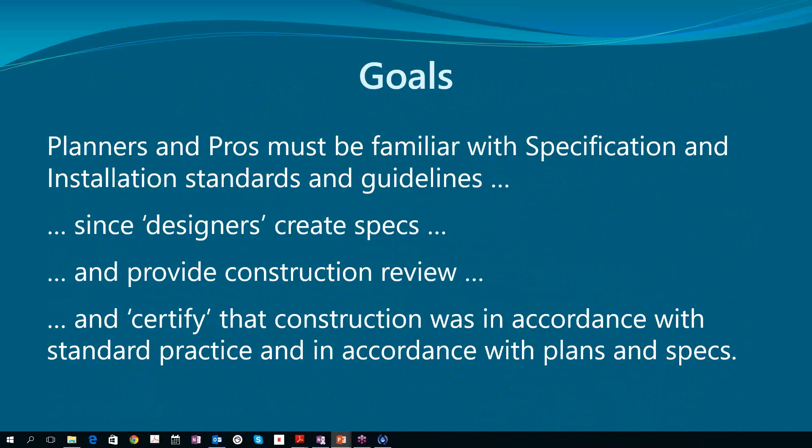Just sort of a commentary for designers, planners, or professionals. I think we need to understand that to stay out of trouble, and that's always our primary goal, is we need to make sure that the installers understand our specs for materials, configuration, and also installation procedures.

There's a bit of a debate going on as to whether we even need installers, that maybe any excavating contractor could do installation work because, after all, it's just following our specs. And I personally disagree, because the average excavating contractor doesn't necessarily understand the specs and doesn't understand what we're trying to communicate.

So installers, we need to ensure that installers have expert knowledge of SPM specification standards and so on, so that they don't screw up, basically, so they can understand what we're saying. If we make a reference to, for instance, sand needs to meet mound sand specs, we need to be sure that they understand what we mean and are able to find those standards.

I think we also need to ensure installers have basic knowledge of SPM fundamentals, like vertical separation, horizontal setback, system selection, problematic soils, and so on.

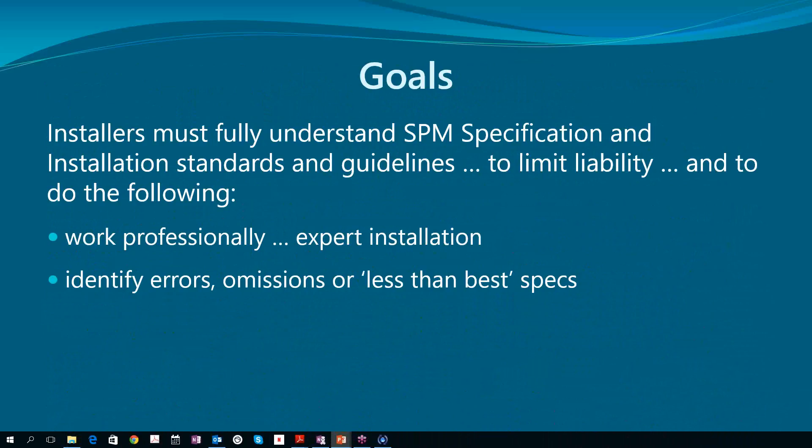And installers need to be able to actually do the work. They need to be able to work professionally, be experts at installation. They need to be able to identify errors and omissions or less than best specs. So again, if they find an error, or they find site and soil conditions that we missed or that we didn't capture in our test pits, installers need to be able to identify that and report it back to the person who did the design.

Installers should be able to evaluate and propose alternatives. So if for some reason the location that I indicated for tanks, for example, if it's not working for some reason, access or there's some obstacle, then a good installer will be able to evaluate all that and get on the phone, propose an alternative on the spot immediately, and that alternative will actually make sense relative to SPM standards.

The other reason for installers to understand this stuff is that installers also certify construction. Planners and professionals are supposed to get a letter of certification from the installer. It's not filed, it's just retained on records. It doesn't replace the letter of certification from the AP on record that does get filed, but planners are supposed to get that from installers, and those certifications declare that the installation was in accordance with standard practice and plans and specs. So in order for an installer to legitimately make that promise, they have to actually understand what the standards and guidelines are.

A bit of editorial here. For all of us, whether we're installers, planners, or professionals, to stay out of trouble, we need to realize how much is required in terms of self-study and compliance. We need to be experts at the SSR, the regulation, the SPM, ASTT, or APEG Code of Ethics. They're actually the same, by the way. Every word is the same.

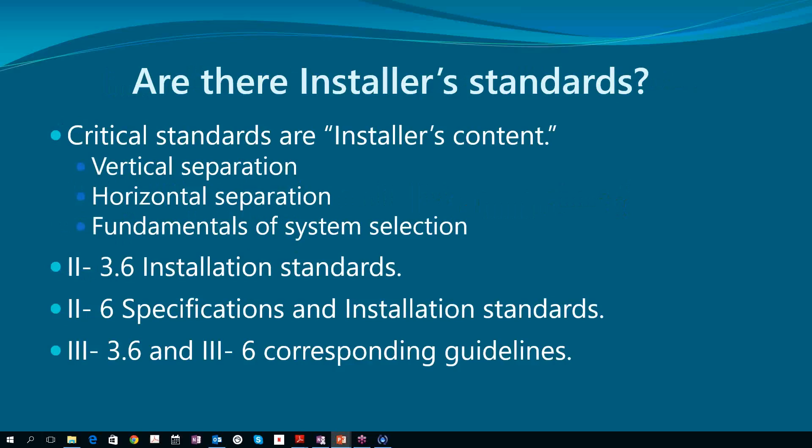So one of our learning goals was to be able to find stuff, and I guess I'm just going to ask whether anybody has any worries about how to find stuff.

Good. As I say, that was covered extensively in webinar number 1. So let's move on. We'll have a look at SPM version 3, volume 2.

3.6. And 3.6 is there. Make it a little bigger.

Some of the key points: it does say install the system according to the drawings and specs. I guess I would hope that goes without saying, but occasionally I run across installers who decided they didn't actually need to follow those things. They actually do, and if there's some reason why they can't, they need to communicate and get approval from whoever designed the thing.

This is new. Installers then need to keep photographs, the SPM says, and notice that's a critical standard in volume 2. APEG guidelines encourage photographs; ASTT guidelines and practice guidelines require photographs. It's the best way to stay out of trouble and is a requirement for installers.

So that means at key stages of the work, for example, before construction, the tank hole before tanks go in, tanks before they're backfilled with everything compacted and bedded, scarification of infiltrative surfaces, drain rock or chambers, and so on. You get the general idea. Take photographs so that they prove you've followed standard practice and the plans and specifications.

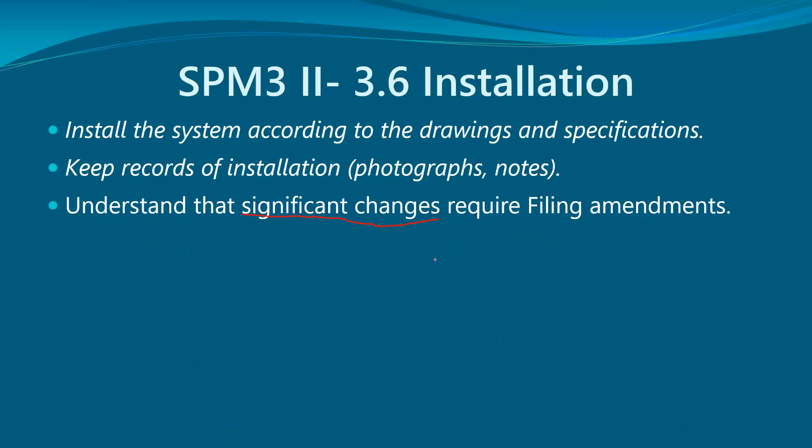So there were a few things out of this section, I think we captured it. Need to understand that significant changes require filing amendments. So if you decide you're going to move the tank location somewhere else, or even the dispersal system, that's going to require filing amendments. So you need to understand that and support that, and communicate with the person who did the design.

You should understand commissioning and what's required, because oftentimes you might be doing all or portions of that without the planner or professional attending the site. So that includes how to flush and test things properly.

It includes providing data for the maintenance plan, so I'm thinking about panel records. The maintenance plan is useless if it doesn't have the original panel records that say how many alarm events, cycle counts, and so on. For example, if there are 5 alarms recorded while we were installing the thing and testing it, then the maintenance provider, when he comes back 6 months, a year, 2 years from now, needs to understand how many alarm events were pre-existing. So hopefully it's still 5. Otherwise he shows up, sees 5 alarms, and needs to understand what caused those.

So panel record squirt height is another example, that needs to be in the maintenance plan. So installers need to do all those things. Sometimes providing data for the record drawing, and needs to support construction review once again.

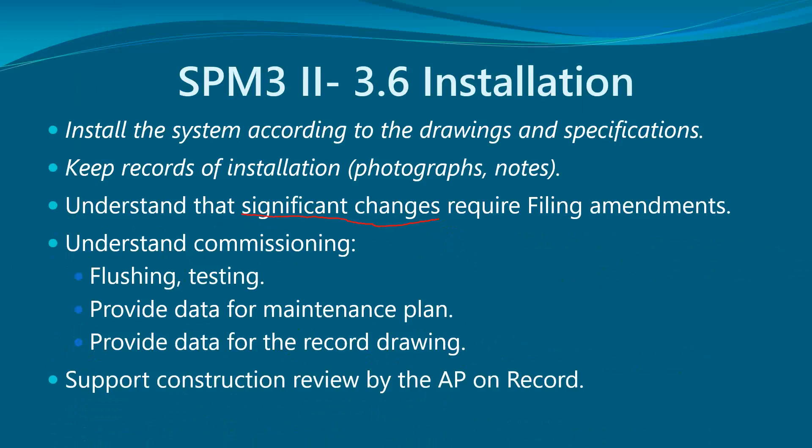Okay, 261. That's volume 2. Volume 2, 6.1, flow monitoring. Make it a little bigger.

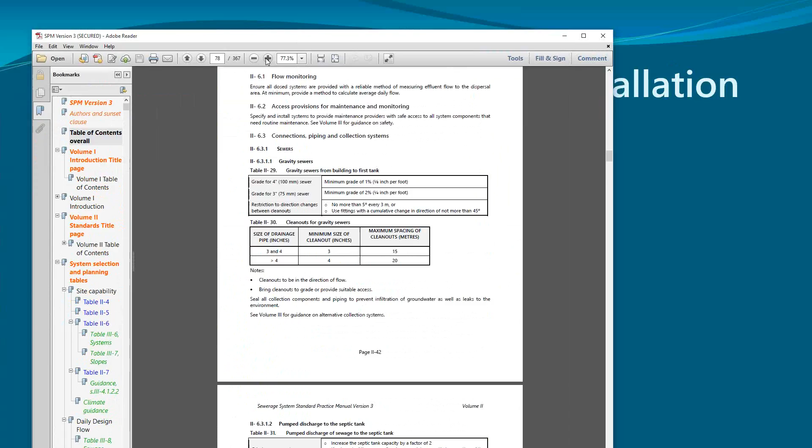So it starts this way, and this is new, so this is important. It's new in the sense that the old SPM said that all systems need to have flow monitoring provisions. And now, as a concession to practicality, it says all dosed systems, not all systems. So dosed systems, including pump to D-box, pressure systems, drip systems, and so on, they need to be flow monitored or have provisions to do that. And trickle gravity systems do not, which I think was quite practical.

In the past we were required to put flow meters at the house or something like that. Now flow monitoring applies to all dose systems. The flip side is that if it's a pump system, we need a control panel, because it has a built-in alarm and controls the dosing, but mostly because it supports monitoring by keeping track of cycle counts. So it's not acceptable to put in a pump system with just a high-level alarm. It needs to be a proper control panel that includes a high-level alarm.

What else did I have here? I got that, and access provisions. Let's go to the actual SPM 6.2. It says that we need access provisions for all system components that need routine maintenance. Let's have a look at that in more detail.

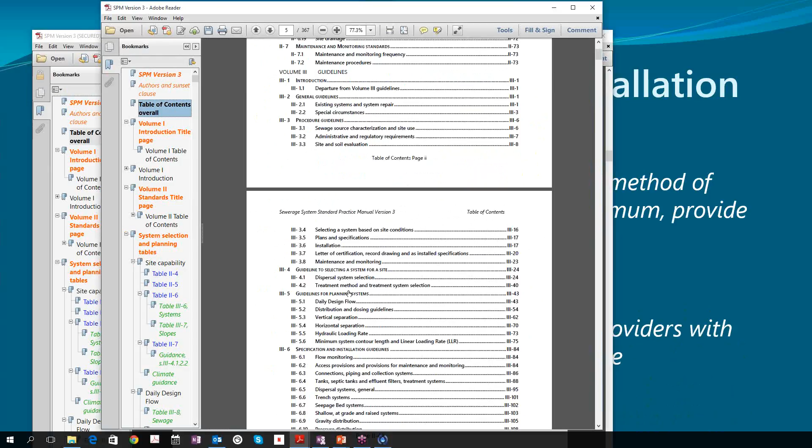That would be 361, flow monitoring. Let's see what the guidelines have to say. It lists a bunch of options on how to do it, including flow meters, even a tipping D-box. Tipping D-boxes are kind of hard to find, but it's a way of counting cycles, because you can put a mechanical counter on the tipping part of the D-box, and it tracks how many times that device tips. That's a known volume. So that's the way to accomplish flow monitoring for a trickle gravity system.

And floats and siphons now need counters to provide flow monitoring for them. Float and mechanical counters for dose systems, and control panels with records. Records of cycle counts is generally the easiest way. There's some other ways too, I guess.

Access provisions guidelines: those access provisions have to be extended up to grade, including tank lids, lawn boxes, and so on. D-boxes also need access up to grade. And that continues to be a source of contention with clients sometimes, because they don't really like the idea of having all these green lids all over the place.

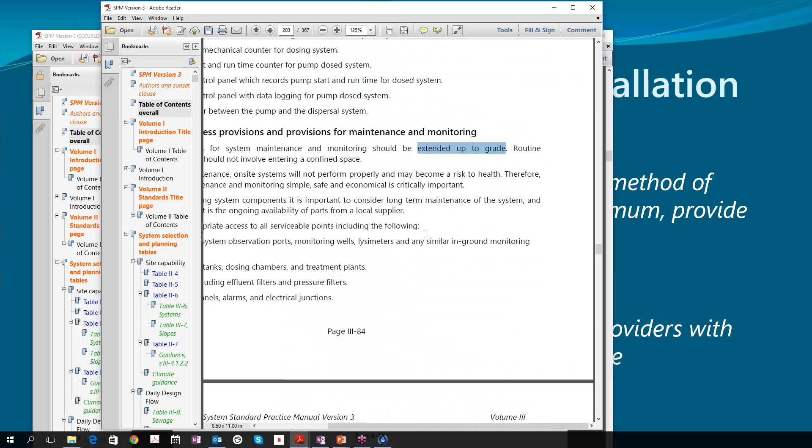But it is required, and I think Tim Wilson's advice is good - I know I've taken it. It's smart to have some lawn box lids and tank lids in your truck when meeting with the owner, so you can literally lay out the lids on the ground and ask, how would this be? Is this okay? If they say no, that's no good, then you can consider alternatives. The other reason is it makes sure they understand we've had this conversation, so there's no arguing after the fact about whether we can bury these things.

Of course, there are landscape features you can put over it, but they need to be accessible to grade. It also says maintenance should not involve entering a confined space. More on that later, but essentially all the valves and unions and filter handle extensions need to be within 15 centimeters of the top of the riser or the lid. It's still odd to me that a lot of people are missing that point. I was looking at one just a week and a half ago where the union was 3 or 4 risers deep, 3 or 4 feet deep. So that's not very helpful - you can't pull the pump out if the union's out of reach.

Let's move on then. Where else are we going? Appropriate access to all serviceable points, including observation ports, infiltrative surface observation ports, monitoring wells if any for groundwater monitoring, lysimeters, and other in-ground provisions. Those are a type of sampling device for drawing a sample out of soil, which we need for combined treatment and dispersal systems, amongst other things.

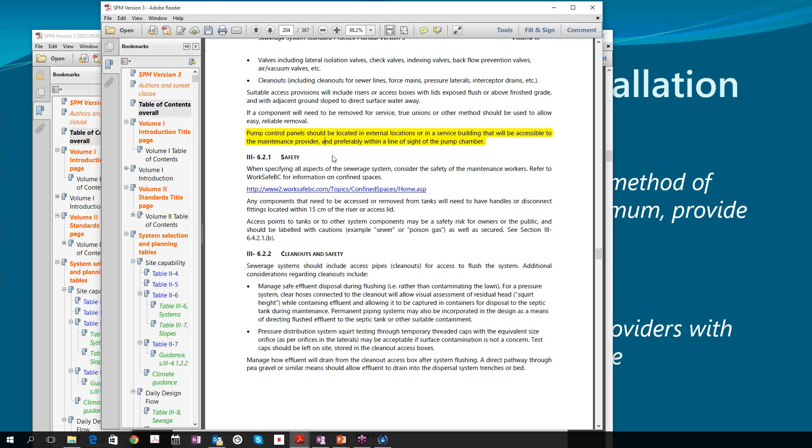Preferably they are accessible outside and within a few steps of the pump chamber, because at maintenance time you need to be able to look in there and do things, including confirming that the pump's operating, draw down, and all that sort of stuff. So ideally the panel is a few paces away from the pump chamber. Let's see if we captured everything there. I think we did.

Sometimes I guess it's possible - I think they're about 9 inches tall, so if you only had 9 inches of cover, you might get away without the extension. But generally speaking, we need these extensions so that you can actually reach in the lawn box to access the valve. Lawn boxes are too short, basically.

And boy, I sure find that a lot - there's a lawn box, but you can't get at the valve because all the pea gravel or drain rock has run around it. So those are 6-inch, cheap, doesn't have to be CSA approved, just cheap ASTM drain line stuff. Again, those are generally required to extend the lawn boxes for lateral isolation valves, and maybe some other things sometimes.

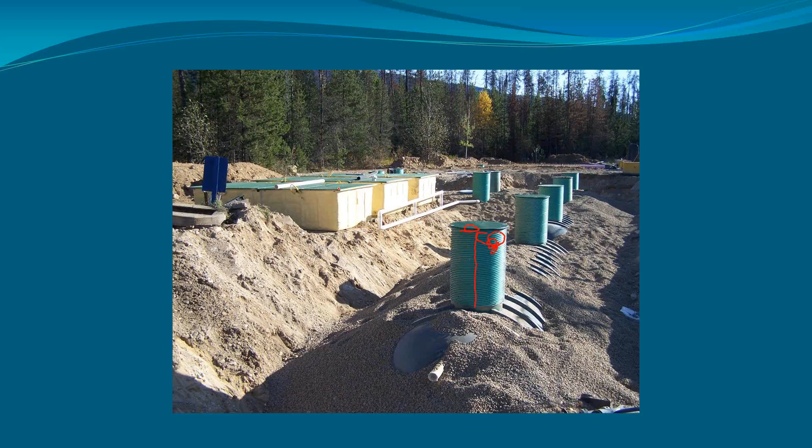Lawn boxes, lots of them, and they are a pain in the butt. They're difficult to backfill without damaging or losing their position. They certainly are a pain for us, and they're a pain for the owners afterwards. Comment about the height.

In this case, the height was intended to allow for topsoil - in other words, a couple inches of topsoil is going on this site. In my own experience, if you leave them too high, the lawnmower catches them and destroys them. If you leave them too low, the grass grows all around them and you can't see them or get at them. So my personal view is something like a half inch, if that, above finish grade is important.

So all these things, not only were they a pain to backfill, but they also all have to be set with a laser, because these things are not at the same elevation - they're meant to support a crown in the finished cover soil. So these two are probably the same elevation, this one's a little bit lower, and this one's a little bit lower again, if you get the general gist of this. Certainly a pain in the butt, but we need them.

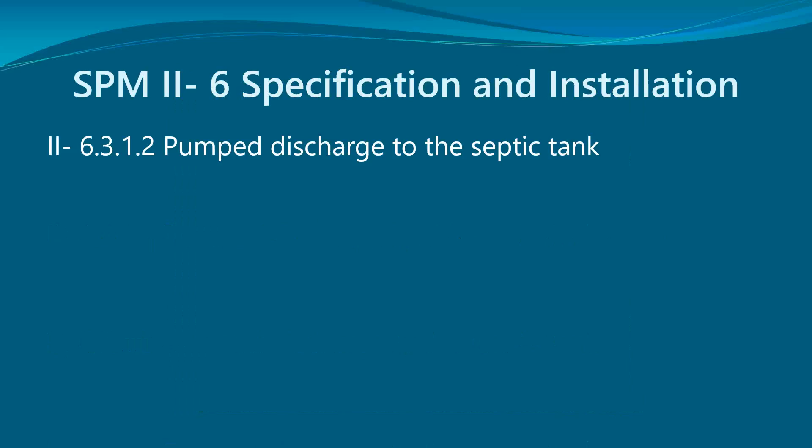2.6 has the specification and installation standards, let's go there. I was looking for 6.3.1.2, which deals with pumped discharge to the septic tank. That could be for a lot of reasons - a deep basement where a portion of sewage is pumped up into the septic tank, a remote building like a mobile home on the other side of the lot, or a cabin. But it's when we're pumping sewage into the septic tank.

A couple of key points - it's not really new, I think it was always this way. Grinder or macerator pumps, we have to increase the septic tank capacity by a factor of 2. The idea being more retention time for settling, because grinder or macerator pumps increase TSS - at least they increase TSS in the septic tank. It's still the same total amount, but there's more of it finely ground up, more likelihood it's going to escape the septic tank and end up in our soil. So we need to double the size of the septic tank if we're feeding it with a grinder pump. This is interesting, I think.

If only part of the sewage flow is pumped, you increase that proportion by 2. So for example, if you had the upstairs plumbing leading directly into the septic tank by trickle gravity and the downstairs being pumped, then you don't need to increase the septic tank by a factor of 2, just some corresponding proportion, if that makes sense.

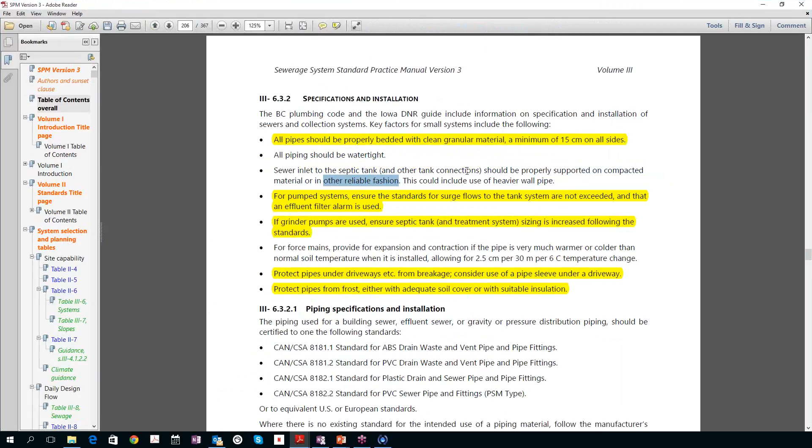Other reliable fashion, some people are trying to dig their tank excavations so tight that there's only 6 inches or a foot of undisturbed soil. Good luck with that, I think it's not worth the time. You still need a jumping jack sooner or later, and I'm not even sure it works, because if the gap is more than a foot, say if it's 1.5 feet, it's still going down. So the point is proper compaction. Get a friggin' jumping jack.

We got the pump systems again, grinder pumps again. This bit down here, protect pipes from breakage under driveways, for example. So that could be a pipe sleeve, and a pipe sleeve is a bigger pipe over a smaller pipe. So it could be, for example, 4-inch drain line, the white stuff, surrounded by a 6-inch SDR28 or something like that, thicker walled pipe. And that also works for frost protection, at least to some degree.

So we need to protect pipes from frost, and this new SPM has a lot of content on freezing issues, a little more on that later. Could be adequate soil cover or suitable insulation. Under a driveway or a roadway, as a lot of you know, especially those from the north, there's a tendency of that to drive the frost down, so the frost will go down many feet, and that won't happen to the same degree on soil that's not being driven on. So there was some new content.

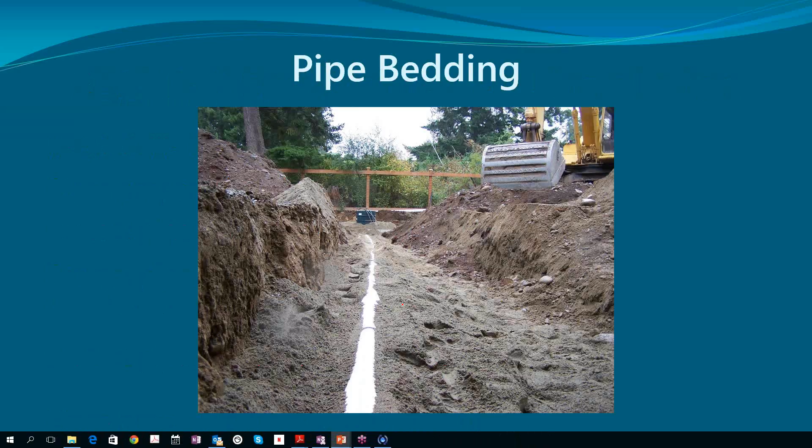So it's got bedding sand under and over, right? In this case, the tape, in case that's distracting you, is because the wiring was going down the same trench from the house. And it doesn't really look like the neatest job of bedding, but it is what it is. Hopefully we got enough bedding over top that we're protecting the pipe.

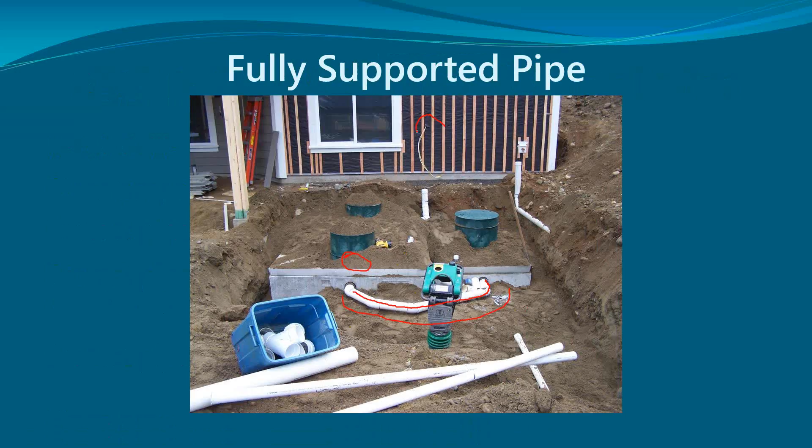If it's a straight shot between tanks, that problem is less pronounced. I do this all the time, wrapping it in that way so the pump chamber is close enough to the wall that the float and pump wires will reach the control panel. It's a very common approach. There's no added risk of clogging because the effluent in this pipe is filtered, no solids in it. Didn't even need 45s, could have done it with 90s.

What else do we want to say about that? While I'm at it, I personally put sand on top of the tanks as well when we have rocky, gravelly soil, especially with poly tanks.

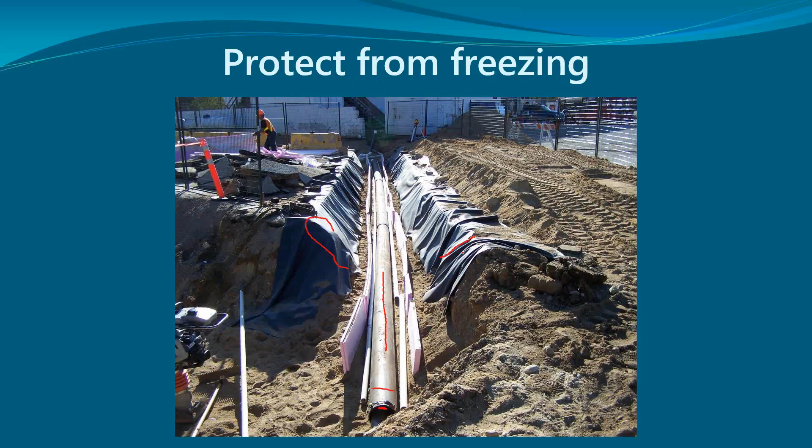Some more insulation to protect from freezing - it's just styrofoam SM thrown over. One little snag, as per the previous picture, is it needs to be perfectly flat - the sand underneath needs to be perfectly flat, otherwise the styrofoam just breaks up. And of course you can't run a jumping jack over it until you get 1.5 feet of fill on it.

That's another story. So styrofoam SM, we do it for piping, and we also do it over top of tanks and down the sides of tanks. Believe me, if you don't, you get frozen tanks - I've got all kinds of pictures of pump chambers that look like popsicles. Freezing is a significant problem in many parts of the province. These were poly tanks, and this is a pretty cost-effective way of doing it.

We could have put styrofoam SM over, but most towns now have some local guy with a pickup and spray foam gear, spraying foam over tanks and risers - I think that works excellent. So that's what that is, spray foam insulation.

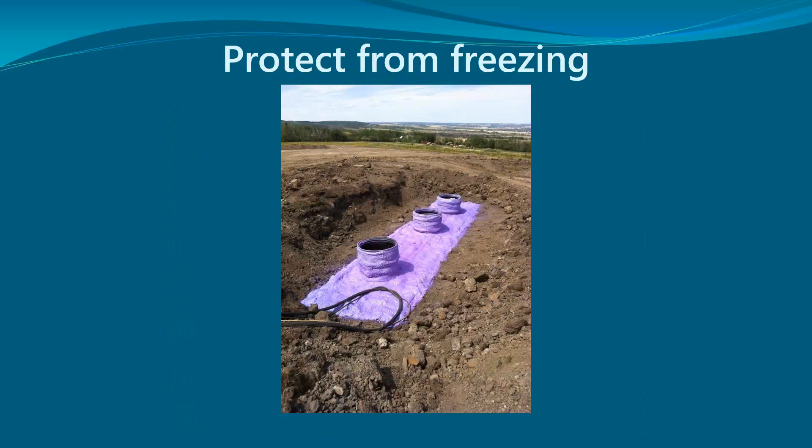We're not covering... sure would be if we were, but we're not.

Good point, I'm glad you asked that question, because it's important: do not put styrofoam over top of the dispersal trenches. This is over the force main - although the force main drains, it drains slowly and it gets really cold up here, so while it's draining we wanted some insulation. But do not put this over the dispersal trenches, and we don't need to, because it chokes it off from evapotranspiration and oxygen flux.

And over the dispersal laterals, we don't need to insulate either, because the strategy for those is to drain them - every third hole pointing down, for example, or even every hole could be pointing down for that matter. Good point.

There's some insulation on the access provision for the indexing valve - so, insulation.

Again, this is just over the tanks, not the dispersal system. So let's move on and see if we can find any new stuff in this section. We'll look for effluent filter and filter alarms once again. The section is 6.4, tanks.

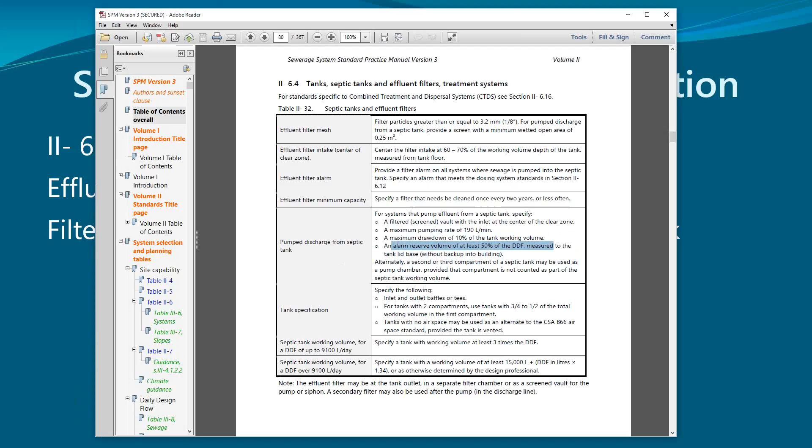Then there's all these standards. So if you decide you're going to put a pump in a septic tank, you need a maximum pumping rate - the drawdown has to be less than 10%. You still need an alarm reserve, which now means you need a bigger septic tank. So for all those reasons, I don't think it's worth it. To repeat myself, I think it's dumb. I think it increases suspended solids, but that was up to folks other than I.

Let's see if I can find a diagram of a pump vault. This is in volume 3. There you go - there's a pump vault, volume 3. I meant to say volume 3.

So a lot of you have seen those things. Those pump vaults are a great big thing that filters the effluent before it hits the pump. Pain in the butt if you ask me, but once again you are allowed as long as you follow all those related standards.

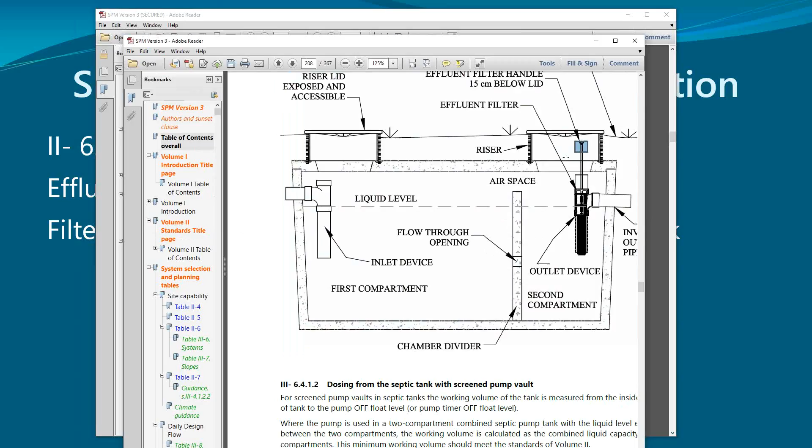They do need to have a flow-through opening, again in the clear zone. Some tank manufacturers do this with a couple of baffles with T's and stuff, and that's okay I guess. They do need a filter with a properly configured baffle drawing from the clear zone, and they need a handle extension to within 6 inches of the underside of the lid.

What did I just do there? Sorry about that. Okay, move that aside. And they need access lids exposed to surface, and the ground needs to slope away.

One guy who's in trouble right now, the reason really was that the ground was sloping towards the riser. The risers are water resistant, not necessarily waterproof, and so the ground needs to be sloped so that surface flows don't gather around the riser. They need to be sealed. Groundwater infiltration is a big deal, and so on.

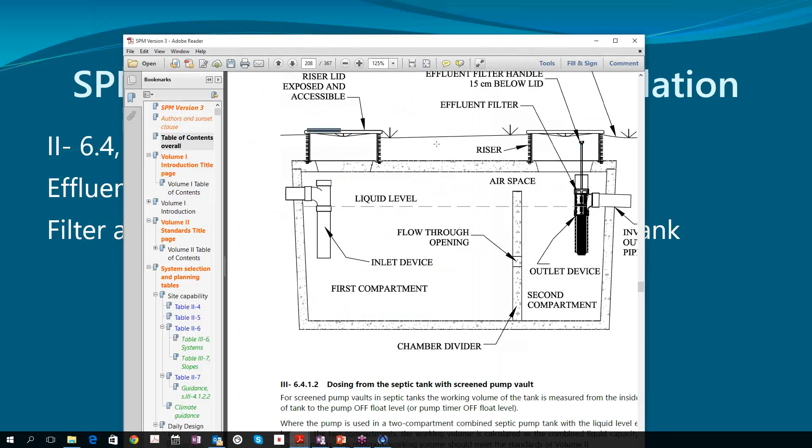I guess that's enough there. Let's see what I missed. Pump discharge from septic tank now is allowed, even if it's a bad idea. You really do need baffles, and the volume of the septic tank needs to be 3 times DDF.

I think I missed that. That is, there it is, it's on the next page. Specify a tank working volume at least 3 times DDF, unless we need to increase it because we have a macerator pump or a grinder pump, or unless we're going to reduce it if it's upstream of a treatment plant. So if it's upstream of a treatment plant, it's not a septic tank, it's a trash tank, and typically the manufacturers want something like 1.5 times DDF, which is fine.

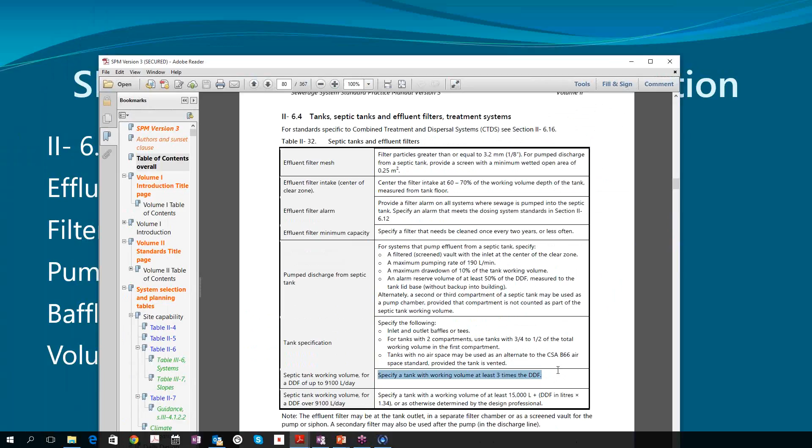Oftentimes I put in a trash tank even if the manufacturer doesn't require it, for one thing, for pump out frequency. Sometimes the settling compartment in a treatment plant isn't big enough, arguably, so it needs to be pumped out too often. In other words, I think a trash tank is always a good idea, but I digress. So septic tanks need to be 3 times DDF. What else did we have here?

Next slide. Tanks continued. We had got to check that they're watertight and have to check that they, well, I almost misspoke there. Let's have a look. 6.4. That'll be on the next page for tanks.

So it says ensure all tanks are watertight. That means we have to do watertight testing as per volume 3 guidelines. We have to fill the thing for 24 hours, make sure it doesn't lose more than, I think it's 0.1% of the volume. Pain in the butt, often need to truck in water for that, but there it is.

And then this is important. They chose this language extremely carefully. It does not say ensure the tanks meet the CSA standard. It says check. And the reason was that some manufacturers of tanks don't have CSA certification, American tanks for one thing. So it says check, not ensure. In other words, they're trying to tell us to consider the issue, make sure the thing actually is structurally sound, but there is no requirement for certification of septic tanks in BC.

Interesting, I know. Then it talks about risers once again. We do actually need a riser for each chamber, filter, baffle. There's some specs on the size of the thing.

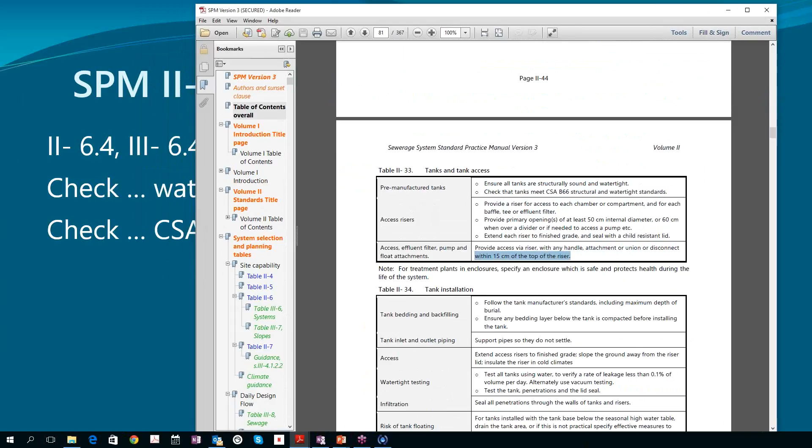It has to be extended to finished grade, has to be sealed with a child-resistant lid, in other words, screwed in place. Once again, all the serviceable stuff needs to be extended to within 6 inches of the lid, the top of the riser. Unions, valves, filter handle extensions. Let's catch up on the slide. Risers, everything within 6 inches.

Wonder if I need to. No, I'll have a picture coming up. I was going to explain that the plumbing then actually comes up from the pump, up into the riser, and across and back down again to a lower discharge point. Photo coming up.

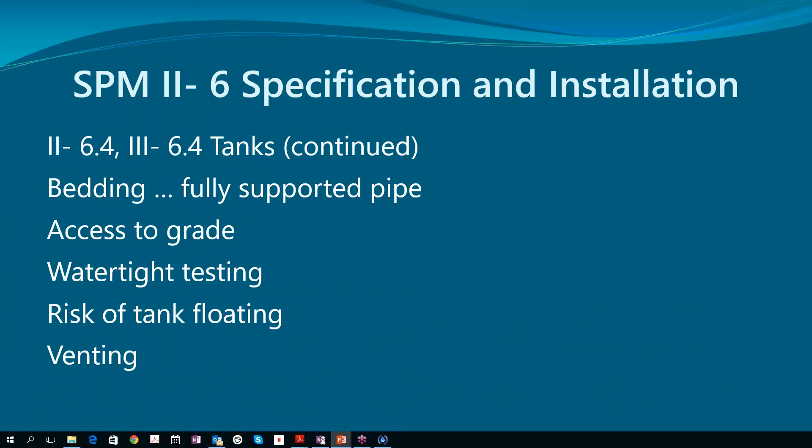A little more stuff on tanks. See, we got once again bedding, fully supported, access to grade, watertight testing, and risk of tank flotation and venting. So I think we've talked about some of these issues previously, but let's see where we're going. That is 2.6.4.

There again was all the bedding stuff. It mentions compaction once again, and support pipes so they don't settle. In other words, if your pipes are going down because you don't have a jumping jack, then you're in non-compliance with a critical standard, and you'll be held to account.

It talks about the risers again, insulation. It talks about testing all tanks, less than 0.1% loss. Volume 3 has a bunch of guidance on how to do that. Test the tank penetrations and the lid seal. Also mid-seam tanks are prone to leakage. Got to seal all those penetrations.

One guy I know, he put in his 2 tanks. They were the same tank. So he was trying to get 2 compartments out of 2 individual tanks, which is completely allowed. But they were the same tanks. Therefore, the outlet of tank number 1 was lower than the inlet of tank number 2, because he excavated them on the same elevation rather than stepping the septic tank down. So he smashed a new hole in the wall and put a pipe in it and tried to grout it up, and grout doesn't work, period. So groundwater infiltration caused a complaint, practice review board, and so on.

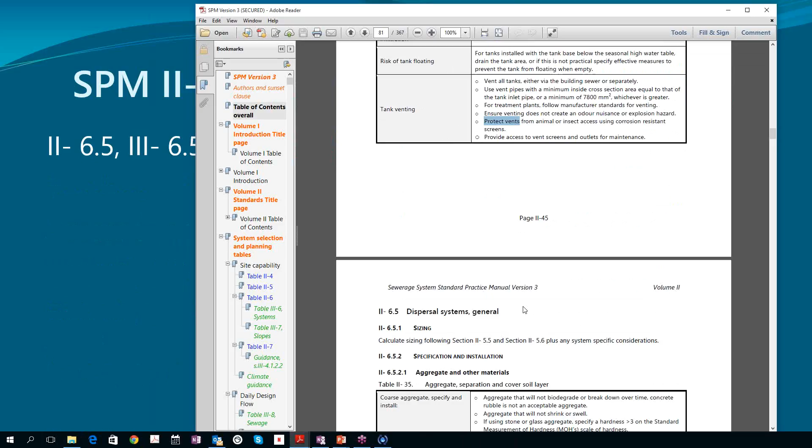2.6.5, back to that. The next section in Volume 2 deals with a bunch of important things.

It includes an aggregate spec that might be new. Aggregate needs to be clean—by that we mean drain rock or pea gravel. So I cut and paste that standard into my specs so the installer needs to ensure it's that clean. And that really is very clean. Typically it's thoroughly washed and hence more expensive.

The issue is silt or clay migrating to the infiltrative surface and contributing to soil clogging. So make sure you buy clean drain rock, check it before it leaves the truck. First load, get up on the sideboard, put your hands in the drain rock, wet, and there should be no clay sticking to your hands.

Enough said. Separation layer, lightweight non-woven geotextile. This is new—the old SPM didn't make it clear. We're talking about the separation layer between the drain rock and the cover soil to prevent the fines from migrating down through the drain rock.

It should not be high-grade geotextile. It should be non-woven so that the fibers are random, not woven in a cross shape, if you know what I mean. The good stuff is too good—it will tend to become a clogging layer, won't allow evapotranspiration up and oxygen flux down because it's too tight. So what we're talking about here is the cheap stuff, the stuff from Walmart or Canadian Tire that you can see through if you hold it up to light, not the good stuff.

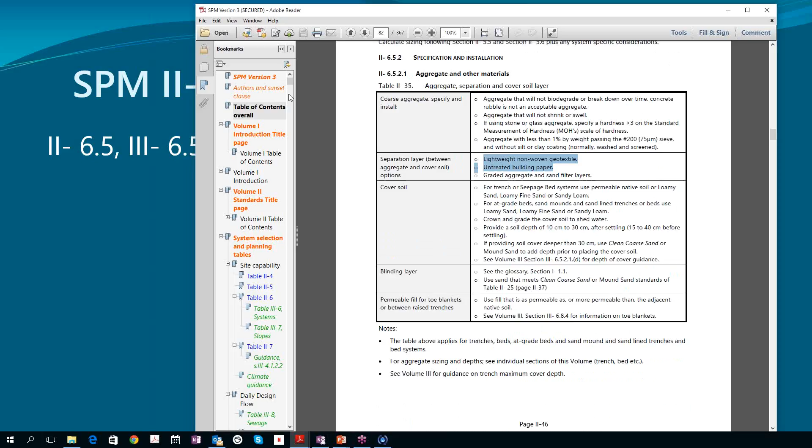Separation layer, cover soil—there's standards for cover soil and the permeable fill for toe blankets and so on. We're still in the same section. Cover soil: use permeable native soil, or loamy sand, loamy fine sand, or sandy loam. So if the native soil isn't one of those, don't use it—in other words, don't use clay.

Or even some other soils that are quite fine, because again it chokes it off. It's absolutely critical to have evapotranspiration up, oxygen flux down, otherwise the thing won't work. So cover soil needs to be the right stuff.

For at-grade beds and sand mounds, it's those same standards, again promoting oxygen and porosity. We do have to grade the cover soil to shed water, meaning no ponding. That means installers actually need to know what they're doing and have a laser and a good eye and be good with a rake. These things need to be landscaped properly—no dips and doodles, no ponding. Pictures of that coming up.

Cover soil depth has to be 10 to 30 centimeters after settling, no more than that, unless more is needed to provide protection from freezing, in which case we have a maximum of I think 45 centimeters. You don't need more than that no matter what part of the province you are, because you're going to drain your laterals. If you're doing that for frost protection, then the part of the cover soil in excess of 30 centimeters needs to be mound sand, or clean coarse sand.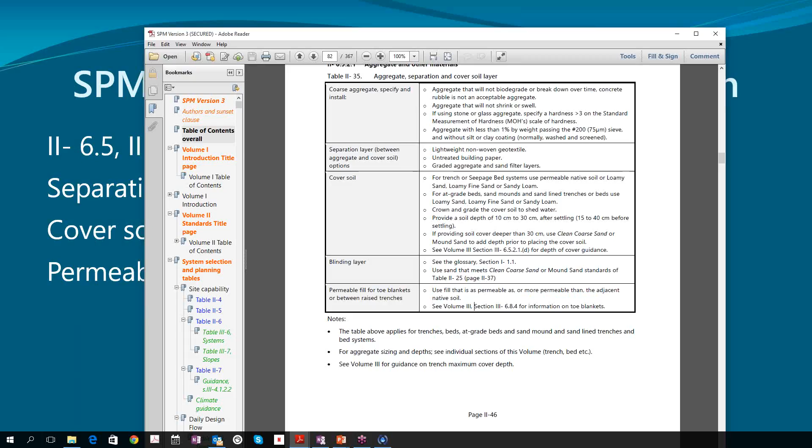Let's see what else I had. Any questions or discussions on that part? That was quite a mouthful. Anybody? I could almost use the break. I almost wish somebody would ask a question. No way, you guys are no fun.

Moving on, gravelless infiltration system, which is fancy talk for chambers. So some new standards there. This one isn't new, actually, it always was. The actual width that we use for determining our area of infiltrative surface is the width of the chambers, the actual width of the chambers. So not to promote any particular product, but...

I guess in order to make my point, I have to mention Infiltrator. Infiltrator chambers, one model is EQ36, meaning that they claim it's equivalent to 36-inch wide infiltrative surface. First of all, it's not. That was a dumb idea in the first place, it's a marketing ploy. And secondly, the SPM now says that we can't do that. The EQ36 are not 36 inches wide, they're only a little over 2 feet.

So you have to use the actual width of the chamber. And let me prove it to you, I guess. Gravelless infiltration systems, effective width is outside dimensions of the base of the chamber. The other thing that's going to come up next on my PowerPoint slide is do not cover chambers with a separation layer like fabric or untreated building paper or anything like that.

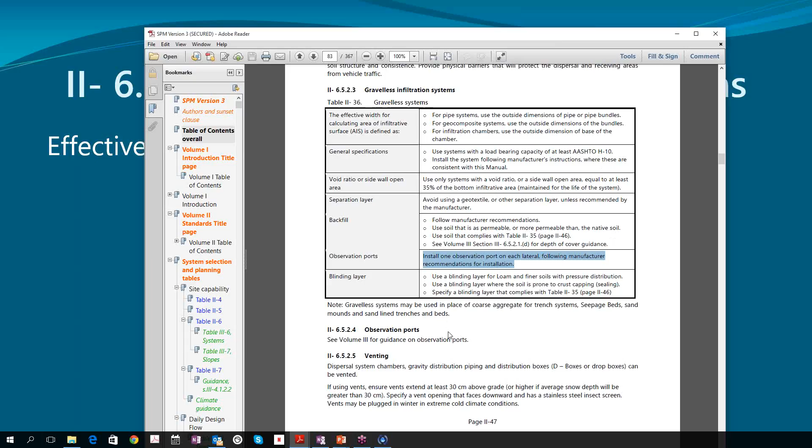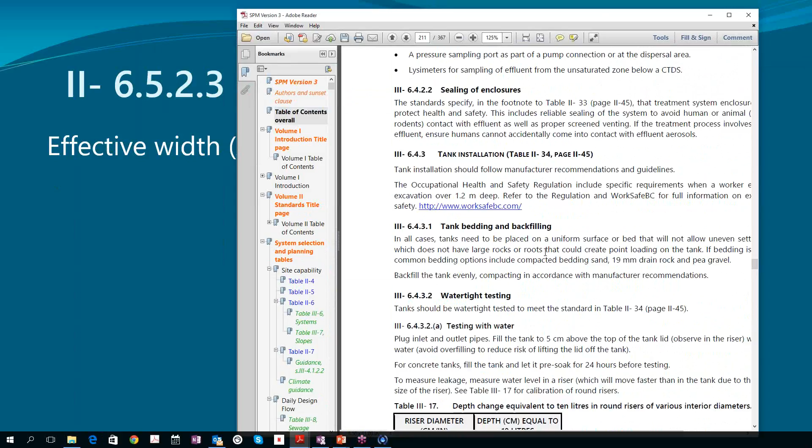Yeah, that's probably enough there, I think. Oh, I know what I was going to do. I was going to look at volume 3 for that same section, and that section was 6.5. There, by the way, as I'm scrolling back, is all our watertight testing standards and what have you.

There is a bunch of material on flotation. Sorry to change the topic here, but I missed this earlier, so I wanted to point this out. We were talking about risk of tank flotation, and this is helpful. First of all, it gives guidance on how to anchor tanks or drain them, but look at this. Here is a way of doing the math to determine if there's a risk or a significant risk of the tank moving around.

Basically, it's a way of calculating the displacement, how much floating action is being applied by groundwater, and balancing that against the weight of the tank and the cover soil. So that's all I'm going to say about it, but it's kind of slick. I'm grateful for it, and if you look at it on your own time, it's pretty simple math. It's the way to decide what the floating tendency is and whether you need to do anything about it.

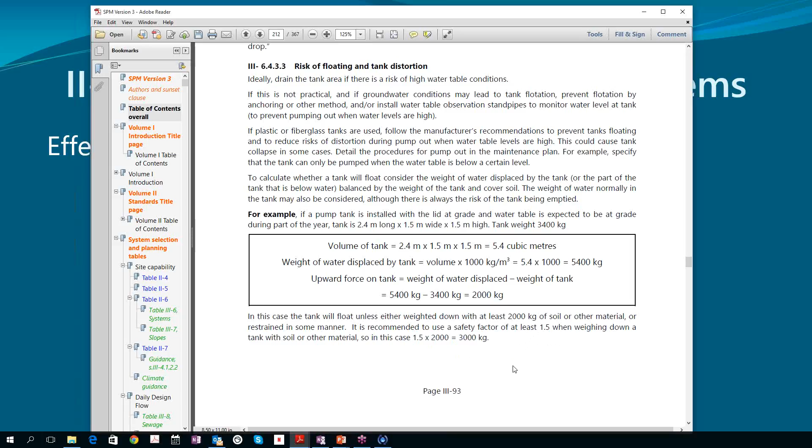Note in this example it says the tank will float unless there's 2,000 kilograms of soil on top of it, so it suggests we use a safety factor of 1.5. So we can calculate the weight of the soil. A guideline is 2,000 kilograms per cubic meter, I believe. Anyway, I'll move on - there's lots of data on how much soil weighs.

What I was looking for before I digressed was a drawing of 6.5.2.3. Here it comes.

6.5.2.3, observation ports - just to be clear, this is not that. This is an observation standpipe for groundwater, so it's going down below the seasonal water table. The observation ports that the SPM is requiring only go to the infiltrative surface.

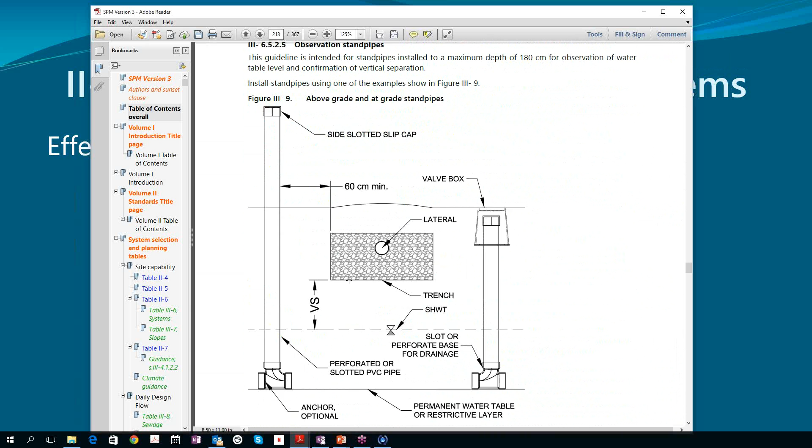Would have preferred a different one. 3.6.6.1, I'll just keep scrolling. Here comes one - there's the diagram I was looking for.

So here is an infiltrative surface observation port. It's a hunk of pipe extended to the infiltrative surface with some holes in it - you know, either take a drill and put a dozen holes in it the size of your little finger, or cut slits with a recip saw, something that will allow the effluent to enter that port if it's ponding on the infiltrative surface. Personally, I put them at least 1 inch below the infiltrative surface.

And they should have provisions to prevent uplift, like a T on the bottom, or a toilet flange, or a hunk of rebar stuffed through it, so that when the maintenance provider goes to remove the cap off the top, he or she doesn't pull the thing right out of the ground. So those are infiltrative surface observation ports. Obviously if it's a chamber, it doesn't go to the bottom of the chamber, it goes to the top of the chamber, but since there's no drain rock, you can look in there and see ponding. This is meant to be for an aggregate trench.

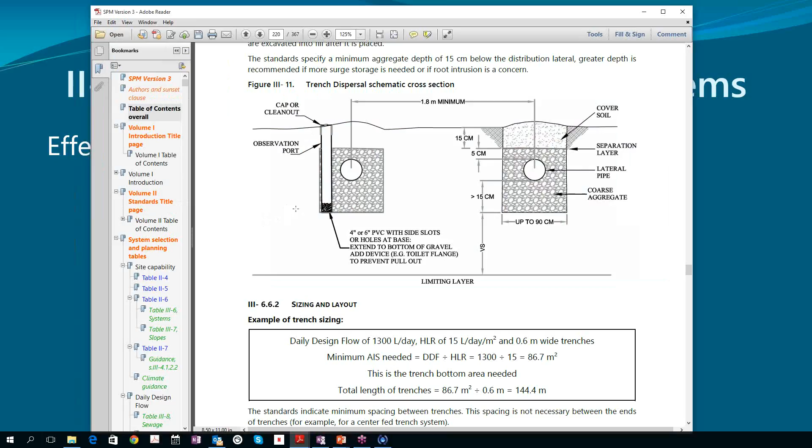Okay, how's it going? 8:30. Oh boy, it's time to wrap this up, isn't it? As usual, it all takes longer than I anticipated.

Trench infiltration systems, 266.3 - so that's volume 2, 6.6.3. A few highlights here, I guess.

Trench width is there - I think this might be new on slopes. The trench width is limited to 60 centimeters. Gravity laterals have to be 50 feet or less, coming out of the D box.

Trenches have to be level. And what do we mean by level? We mean really level - we mean 0.17%. It's at 2 inches in 100 feet. They do have to be along the contour of the land.

Remember, these are trench systems. Still seeing a lot of people running their trenches or beds down the slope. It's insane, I don't know what they're thinking.

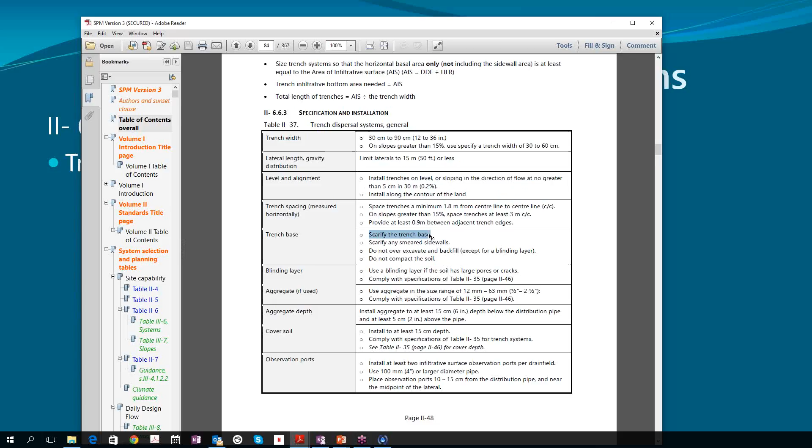There's a spacing, still 6 feet, unless the slope is significant, in which case it's 3 meters. Do need to scarify the trench base. Do not over-excavate and backfill, because now you've got a settling issue. Do not compact the soil, including the blinding layer - you're trying to scarify it and keep it loose so that it's infiltrative.

There's some aggregate specs - don't use 2.5 inch rock, even though you can, it's too big. 3/4 inch is good, unless you're using pea gravel. This is brand new: 6 inches below the pipe, not 9, and 2 inches over. So we just saved some money. That is for drain rock meeting the standard in the box above. If it's pea gravel, it can be even less - 6 inches instead of 9 inches.

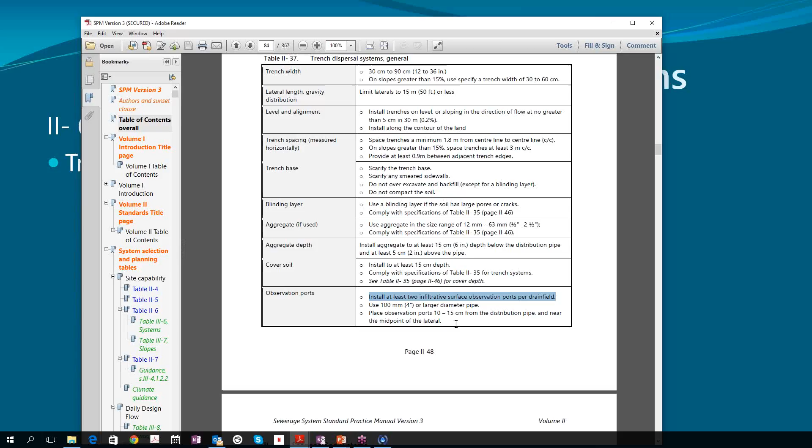There's a big change - cover soil. And here we go, 2 observation ports if it's a trench system, not a gravelless trench. But again, for the chambers we need 1 for every lateral. If it's aggregate, we only need 2. Clear enough. What else have I got?

Lateral length - back to my slides to remind me of what I'm supposed to be saying. Lateral length, level on contour, scarify, aggregate depth 6 inches, cover soil - been there and done that. Observation ports, 2 of them.

Seepage beds, table 6.7.3, next page.

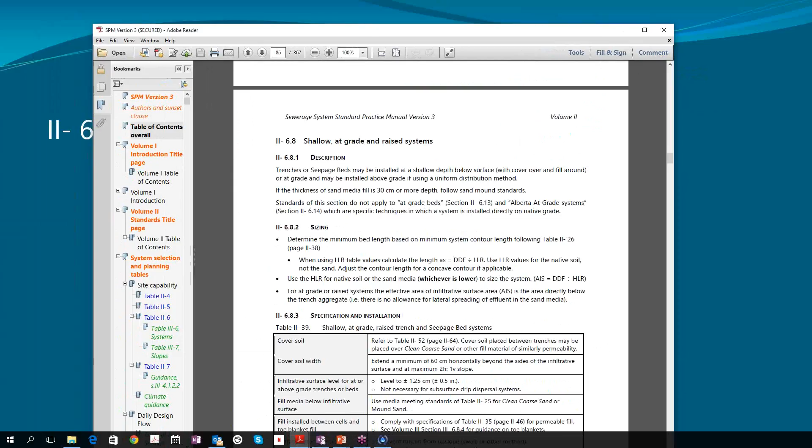So, what do we got? We got that this now is for beds, right? Seepage beds, and these things need to be level, really level, within half an inch. We want the infiltrative surface to be level so that as it starts to clog over time, it doesn't create ponding. It's going to make a more even distribution because the thing is level. Another reason to have a rotary laser and to have installers who know what they're doing.

Any fill below the infiltrative surface has to be mound sand or clean coarse sand. We do have to prevent runoff from upslope using swales. Cover soil, no ponding. I'm trying to talk faster.

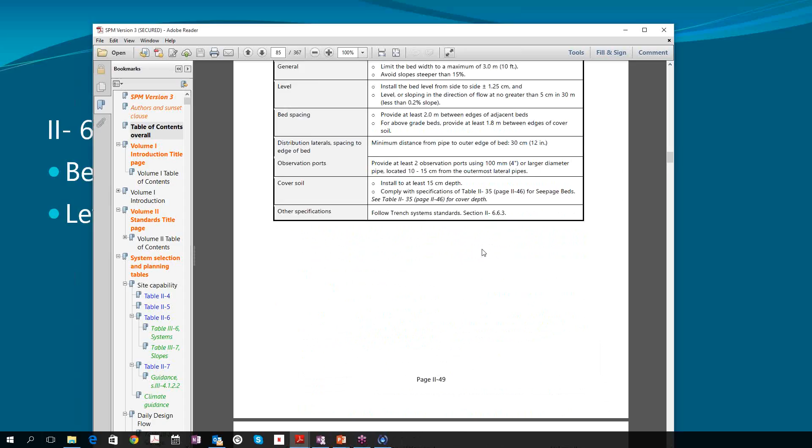Bed width, I missed it. Bed width was 3 meters. Sorry about that. Bed width, where did it go? Well, I'm not going to hunt it down now, I guess. Oh yeah, it was back here. Beds have to be no wider than 3 meters.

Maybe I went to the wrong thing when I was talking. Side to side within half an inch. Longitudinally 0.17%. They need to be level. I think we've been there and done that, and let's try to carry on. You guys are very patient. Sorry that my timing is taking way longer than anticipated.

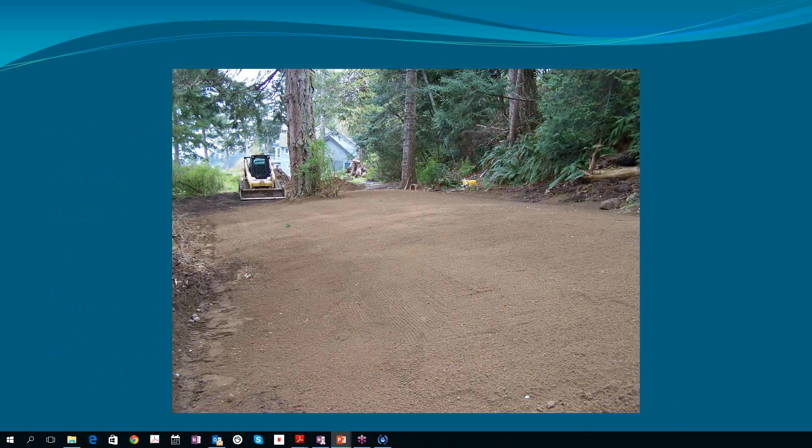And crowned and grade. So this is what we mean: it's crowned, it's graded, there's no ponding, and it's suitable for grass. I missed that point earlier, but I'm not going back there now. These things need to be able to support grass or other suitable vegetation. We need to do a good job of this stuff, and no ponding.

Also, we need to manage surface flows, and that's why there's a swale here. There's a path for any surface water to go away. There's another swale leading off in that direction. And this surface, hopefully, is perfect enough that there's no ponding.

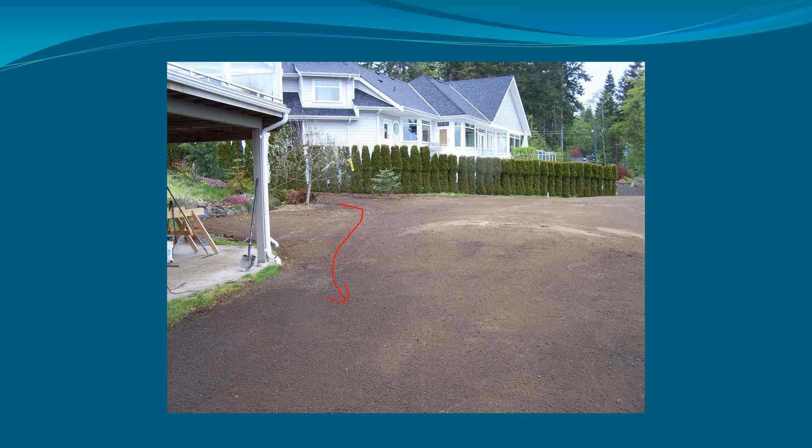Usually what it means is a whole bunch of expensive landscaping, which is why we can't work cheap. We have to bring in material, topsoil, lawn sand, and this takes a long time. It's also why we have to be competent excavating people or have installers who are, because otherwise this will take you three days to do this. This is a big job, raking off this amount of area. So the trick is to place the material really close to being perfect with the machine.

Generally what it means is you're giving the client an entire new yard, and that's just the way it goes. You need to have that conversation. You need to explain. You could have it as an exclusion, but then they have to sign something saying they're actually going to make sure this thing is finished and grassed. Usually it means a new yard for the client. You have to fix all the disturbed areas, not just our dispersal system.

I think I kind of went there because I was jumping around, so let's just speed read this. Shallow at-grade and raised systems. No, we didn't, we went to seepage beds, but not raised ones. So raised ones, it's the same stuff. They need to be level, half an inch side to side, two inches at 100 feet longitudinally. Any fill has to be sand media. Fill for cover soils has to be good stuff.

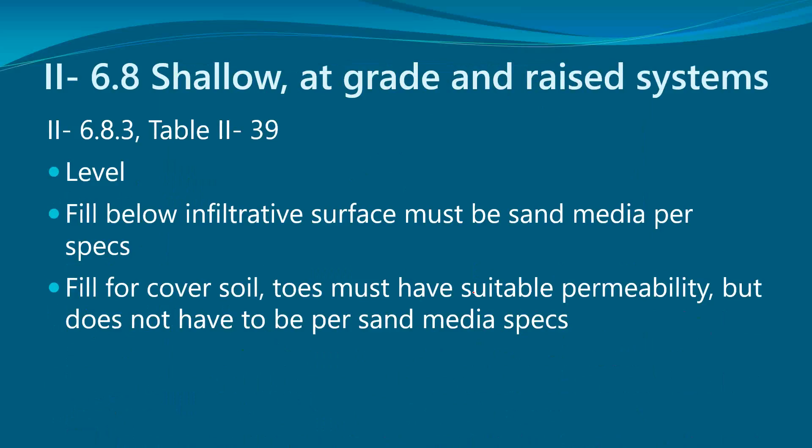What else have we got for... yeah, we need to make this point. I'm going to go to volume 3, section 6.8. So we need to understand, first of all, that these things, seepage beds, can be at or above grade without being a sand mound, right?

But even though they're not a sand mound, they still have to have sand media fill on the portion. In other words, we can't haul in some good fill or some pit run or something like that to raise the system above grade. The reason we're doing this is probably vertical separation, but there you go.

If it's above grade, it has to have uniform distribution, in other words, pressure or drip or something. If that fill, in other words, if we're raising it more than 30 centimeters, now it's a sand mound, and then we have to follow all the sand mound specs.

Then I need to make this point, I may have made it in an earlier webinar: a raised bed or an at-grade seepage bed is not the same as an at-grade bed. Those are special things. There's two specific technologies for at-grade systems which are placed directly on the native soil, and those are at-grade beds and Alberta at-grades, which is not the same as a seepage bed placed at an at-grade elevation. A seepage bed has to be perfectly level, and all the associated standards with lateral spacing and all that would be as per seepage bed.

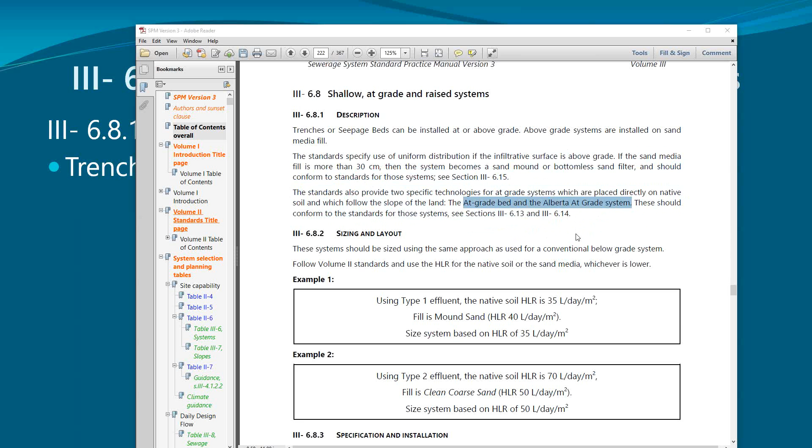That is going to be... I'm going to see those. Nope, okay, bear with me here. I covered up some notes.

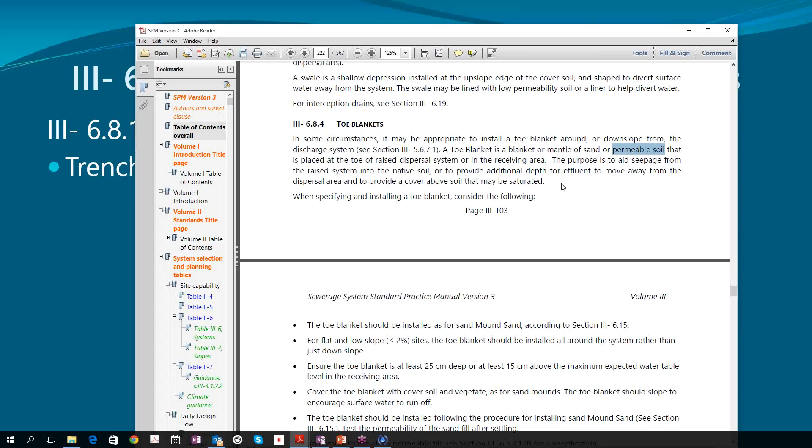681, 684, 684. Toe blankets, same story as a toe blanket from a mound sand. Can be permeable soil, doesn't have to be mound sand, doesn't have to be C33. Just needs to be reasonably permeable.

Let's go back to my slides. A lot of content here. So again, don't confuse these at-grade systems with an at-grade bed or an Alberta at-grade—have to be pressure. 3684 says that toes can be clean permeable fill, in other words pit run.

Gravity dispersal—in the interest of time, I'm not going to go back and forth. It specifies the lateral pipe slope, which is level. Gravity systems should be level, and by level we mean no more than 2 inches in 100 feet, sloping in the direction of fall.

There does need to be solid pipe from the D-box to the laterals, to the actual drain rock chambers, for a gravity system. It's not right to start perforated pipe right out of the D-box with drain rock, because then, as the infiltrative surface clogs, you can have water going back into the D-box and so on.

CTDS, combined treatment and dispersal systems, you don't need pipe in the bed. So we're thinking mostly about the open bottom version of combined treatment and dispersal systems that then have drain rock bed underneath it. For a while, the salesmen and others were putting 3-inch perf pipe in there. Don't need it, it doesn't really help. It's not going to be even distribution anyway. It's still going to overload the soil under the tank. Don't need pipe.

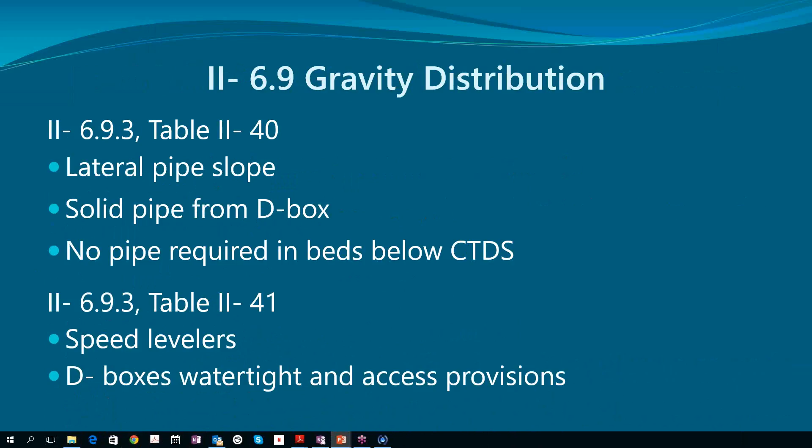I'm just going to move on, I guess. Oh yeah, very cool, is it? Yeah, I'll be heading there myself.

Gravity distribution in 3691—the definition: gravity means that the distribution laterals are not under sustained pressure during a dosing event. In other words, they don't get up to full squirt or anything like that. So that includes dosing systems where the effluent is dosed to large diameter pipes by pump or other method, including some of the CTDSs and including a pump to D box.

A pump to D box is not uniform distribution. It's not pressure dispersal. A lot of people, oddly enough, think it is. It's not—it doesn't make all the soil wet. Instead of coming out 2 holes, it comes out 10 holes.

Where else are we going here? Dosing—yeah, that's all I got there, I guess. So once again, dose to D box is still gravity distribution. It's not pressure, it's not uniform distribution. Uniform distribution requires that every half square meter gets wet, the same amount of wet within 15%.

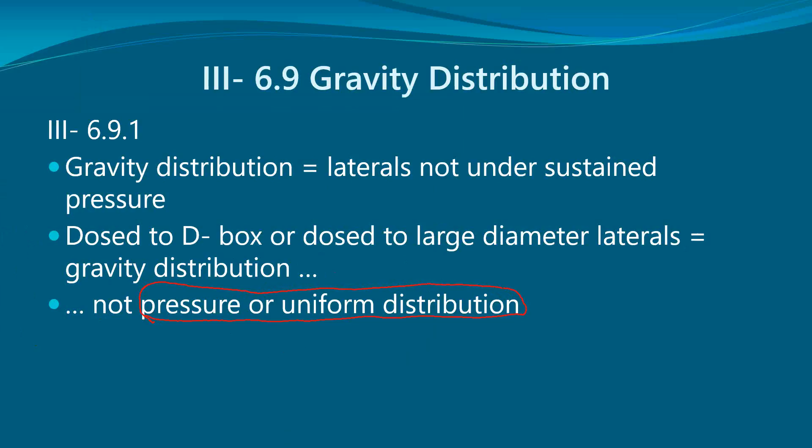So we're getting closer. Dosed gravity systems, again, because of time, you have to moderate the flow velocity. I'm not going to open up the SPM because it's getting so late. That means the pump can send so much flow volume into a tank, or a D box for that matter, that it disturbs things, or causes preferential flow in the D box and so on.

So by moderating flow velocity, we mean, for example, a 2-inch force main heading to the D box or a septic tank, and then a chunk of 4-inch, like a length, 10 feet of 4-inch, which then slows down the flow. Dosed gravity systems—the pump controls, pump chamber standards apply.

You still need reserve volume. Now you need flow monitoring because it's dosed. Dose frequency is still important—dose frequency is at least 1 time per day based on DDF. Dose volume is a flood volume.

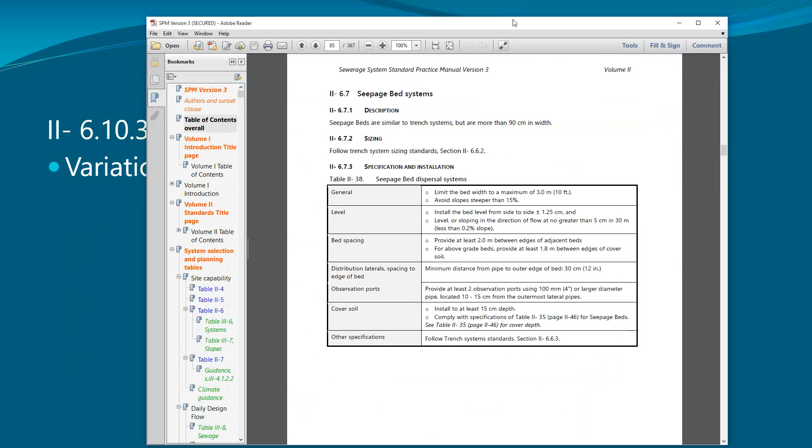Again, because of time, I'm going to move on. We do need to look at this—this is 610.3. Some important standards there.

610.3. We need to plan and adjust the system so that it squirts within 15% across the network, 10% along any single lateral. In other words, squirt heights have to be very similar, and that comes down to hydraulic design.

A couple of things here. We got 60 centimeter squirt height when using 3/16 orifices or larger, and it's 150 centimeters if we're using smaller ones. Always was, not really a change, I guess.

Dosing frequency, distribution uniformity. This is important. This is how we determine the number of orifices. It's 1 per every 6 square feet. So AIS divided by 0.56 meters squared gives you a number, and that's how many orifices you need.

A lot of people are missing that. This is new. We can now use tiny orifices, even for type 1. We used to not be allowed to unless it was type 2 or 3. They were worried about orifice clogging, but we've discovered with some experience that it's not an issue. If you've got proper squirt height, it's not going to clog.

This makes it different for pump sizing. If you run into a situation where you do the math and you need a 1 horsepower pump, but just barely, try it all over again with 1/8 inch orifices, and you might find that you can get away with a smaller pump. Oddly enough, people are still missing this.

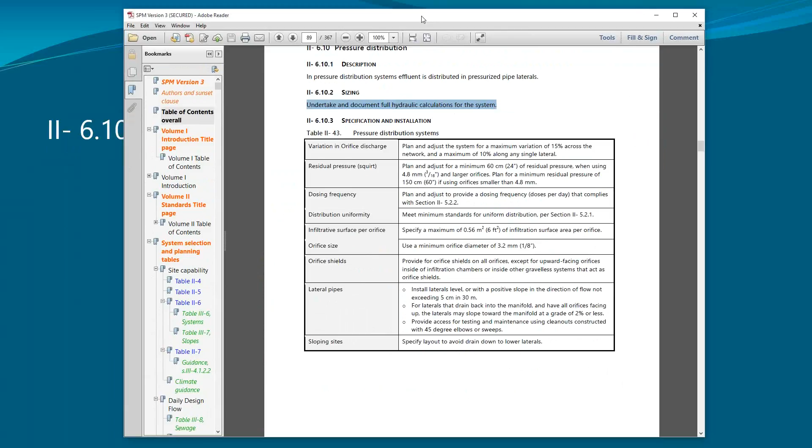The old SPM had a bunch of content in the appendices, but it does say we have to document that. So in our filing documents, we have to actually show the math, full hydraulic calculations, total dynamic head, minimum required pump flow for squirt height, and all that kind of stuff. That's probably enough for now. Hydraulic design is a big topic, including some of this stuff out of Volume 3.

We have to get full squirt for 67% of the cycle, and we have to meet the soil dose frequency from the other standards. And those are contradictory. If you have 1.25-inch pipes, 50-foot long laterals, you can't get 10, 12, 14, 18 doses per day and still get 67% of the cycle at full squirt.

So that's important to note: 67% at full squirt means, as a guideline, at least 3 times the draining volume of the system. 3 times the laterals, 1 time the force main if it's draining. And then we have to balance that against the soil dose frequency, and if those two contradict, then we need to apply some strategies to balance that, to make that balancing act work. In Volume 3, they have some strategies to make that happen.

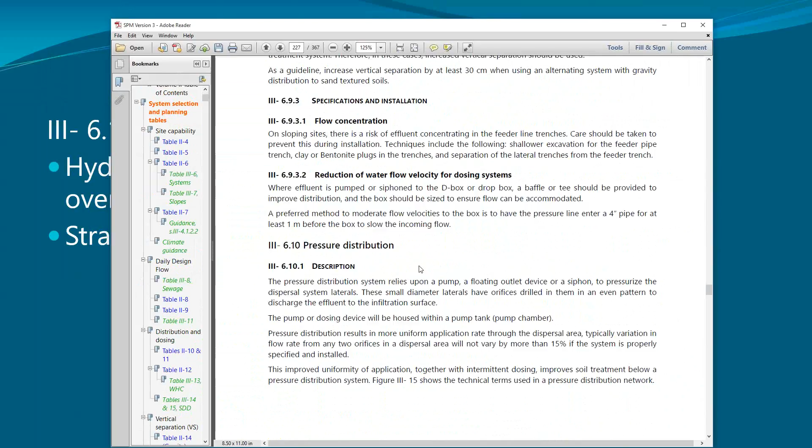6,10. Should have known better than to try to fit all this content in one webinar. 610 2.2. Here's all the stuff that you can look at in your own time. 67%, full pressure. Here's how to do it if you're having trouble balancing that against soil dose frequency.

One is keep the laterals full. I do that all the time, but I don't need to worry about frost where I come from. If you're up north, you can't do that, right? You can't drill all the orifices up. If you keep the laterals full, it takes less time to get to full squirt, so you have a better chance of getting 67% at full squirt while still meeting a dose frequency over 8 or 10.

And that means the laterals have to be completely level. If it's a 1-inch lateral and it's got a 1-inch dip in it, it's going to be empty, right? So it has to be exceptionally level. You can avoid having this stuff, the force main and manifold, draining to the field by placing it lower than the laterals.

You can use short, small diameter lateral pipes. Some of my friends in Prince George, their laterals are only 20 feet long and they're 3/4 inch. And 3/4 inch, yes, you can get jetting equipment down them if you have proper cleanouts. 1 inch is way smaller volume than 1.25 inches, and 3/4 inch is way smaller again, right? Because pi r squared makes a huge difference. So small, short laterals will allow you to have time dosing at 12, 18 doses a day, 24, 36, microdosing, and so on. Small, short laterals mean quicker pressurization.

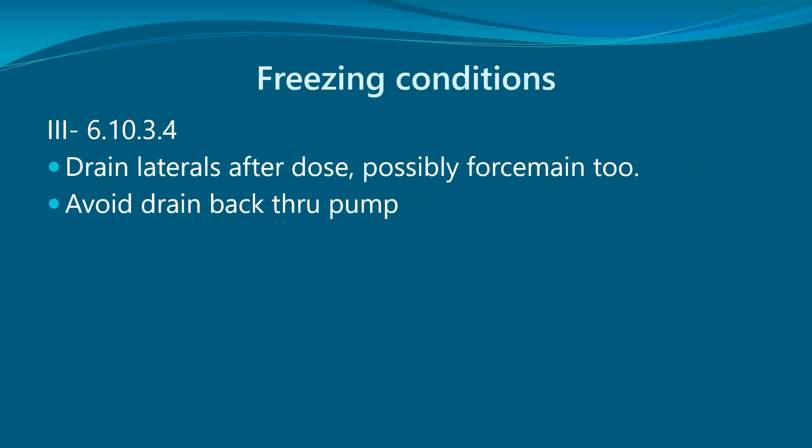There's a whole bunch of content on freezing conditions. Since I'm running late, I'll just say the way to deal with freezing conditions is to drain the laterals after each dose with some of the orifices pointing down, and possibly drain the force main too. If you're draining the force main back to the pump chamber, avoid draining it through the pump, because if the dose engages when the pump's turning backwards from the draining volume, you can break the pump. So we put in a check valve and then a quarter inch orifice or larger just past the check valve, and it drains through that.

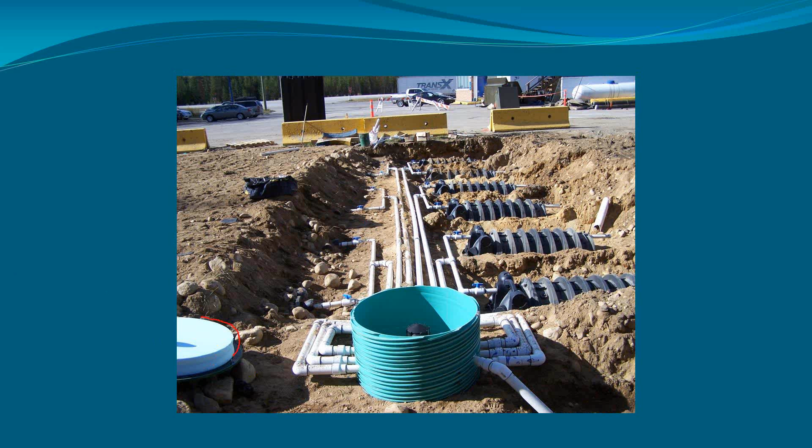Speaking of freezing, we've got some insulation in the bottom. We're going to fill this thing full of insulation. You can fill it up with fiberglass or styrofoam popcorn, and the lid needs to be insulated like so. You can buy kits where all this comes pre-done, which is very helpful. Freezing—we've been here and done that, right?

Sleeves, insulation, and poly barriers. Insulation over this is the manifold, not the dispersal trenches. Dispersal trenches are running off this way and this way. So even though those lines are meant to drain, they drain fairly slowly, so insulation makes sure that we're not freezing up.

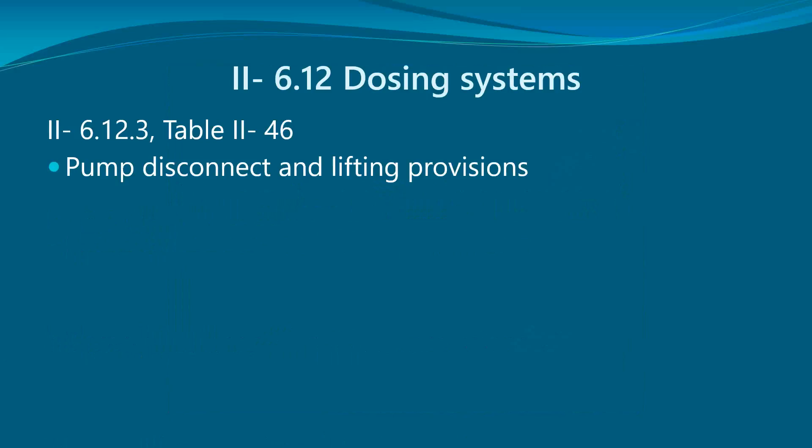Pumps: we do need a pump disconnect, lifting provisions, independent supportive floats, everything within 6 inches. Wiring has to be long enough to remove the pump and the floats, and we need an alarm on a separate circuit. So where did I get all that from?

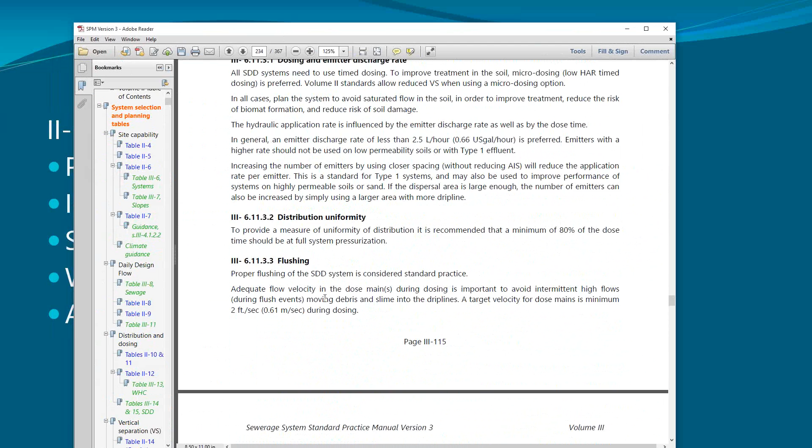I got all that from volume 2, section 6.12.3. There was a bunch of stuff on hydraulic design. You guys must be getting tired of listening to me yatter along here.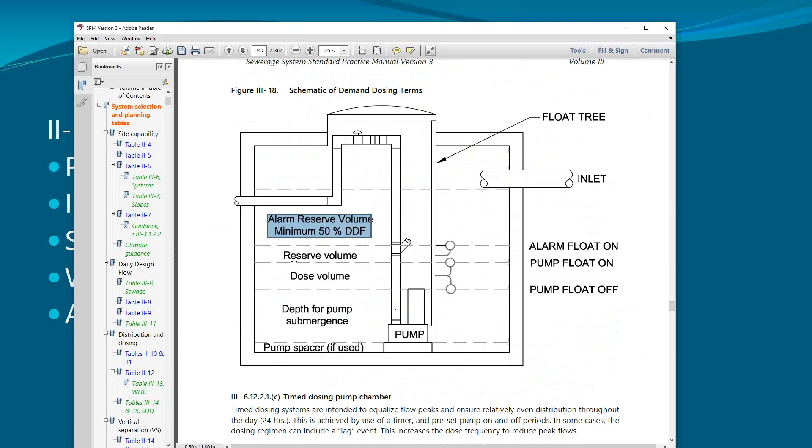Here's some terminology. There's alarm reserve, which is 50% of DDF, and then there's reserve volume, meant to keep the alarm from coming on frivolously. That's 15% of DDF.

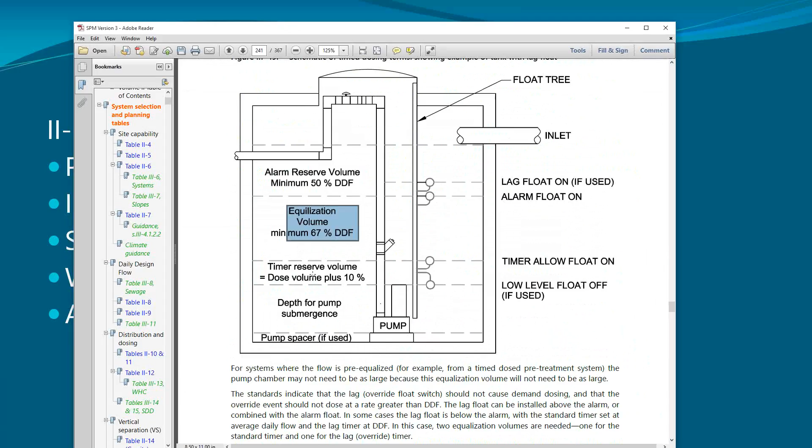Time dosing has a whole bunch of content for you to look at on your own time. We need a bigger pump chamber because we need the equalization volume, timer reserve volume, and so on. A bunch of good stuff in volume 3 for that.

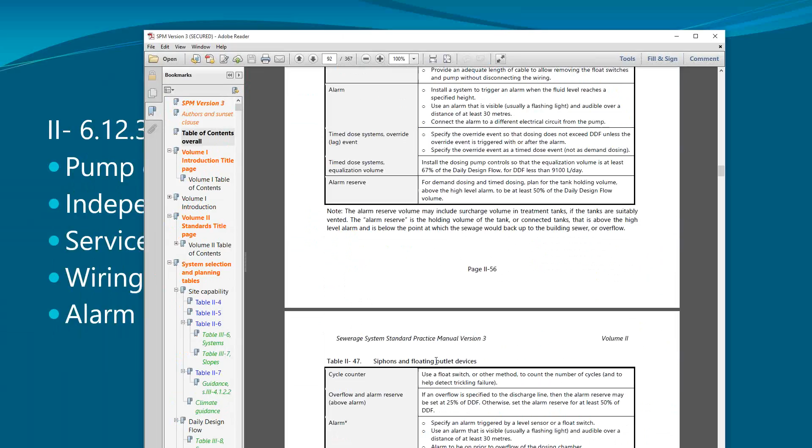I guess I missed the wiring. We need 2 circuits, which shows up in volume 2 - one for the alarm and one for the pump, the control panel and the pump. If it's a control panel, both circuits go to the control panel, but within the control panel it splits - one to the pump and one to the alarm.

What did I want to get out of here? Connect all wiring, adequate length of cable - all this stuff is important, I guess, but we're running out of time. We do need a union, a rope or other means to lift the pump out, weighted floats, independent support. I'm repeating myself, which we hardly have time for.

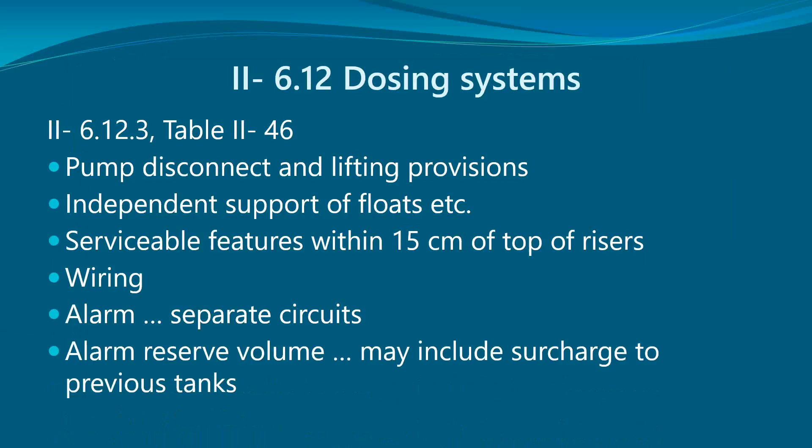I'm going to move ahead and wrap this up. I've got a few more pictures. Pump chamber sizing for demand dosing is 1 times DDF. For time dosing, it's at least 2 times DDF.

This is new - there's a new standard allowing surcharge to upstream tanks for the alarm reserve. You can look that up on your own time. What it means is we can put our pump chamber deeper than the outlet - the lid of the pump chamber can be deeper than the outlet of the septic tank, or equivalent to, and that can become part of the alarm reserve volume. We could even theoretically have a bit of surcharge into the septic tank, although I'm not sure that's a good idea.

It explains dosing terms - talked about all that stuff, indexing valves. Here's what we mean by some of those things. There's a union to pull the pump, a pump lifting rope, a weighted float arrangement - you can just see the weighted float behind, or the float behind the weight. There's a float hanger, and what else do we need? We have a check valve in here. Personally now I'm putting my check valves down there, but that's another story.

The other issue is this is how we need to plumb our piping inside the pump chamber - up and then back down again, to keep all this stuff within 6 inches of the lid. If we had the time, I was going to look at standards for indexing valves. The short version is indexing valves need a valve, a union so you can remove this thing, and a bunch of unions actually. They should have clear pieces of pipe.

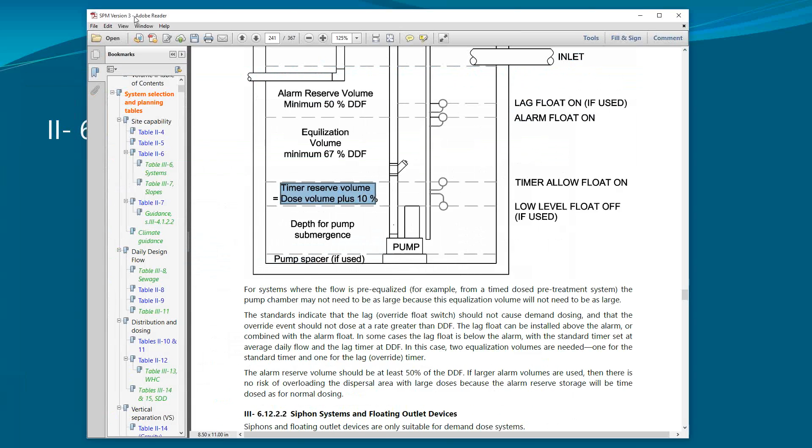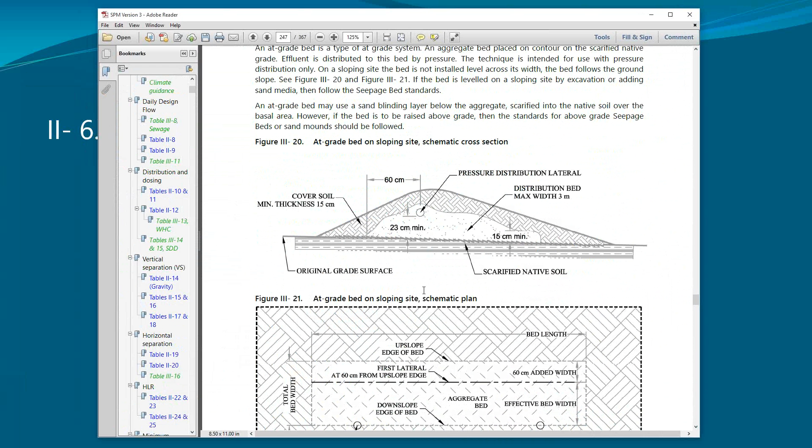At-grade beds are a completely different thing, and I do want to show you what we mean. An at-grade bed and an Alberta at-grade is this - it's not the same as a seepage bed placed on the surface. There's an at-grade bed, which has a completely different set of standards - it doesn't have to be level, different drain rock depths, and so on. An Alberta at-grade is another example of something that's not a seepage bed placed at-grade.

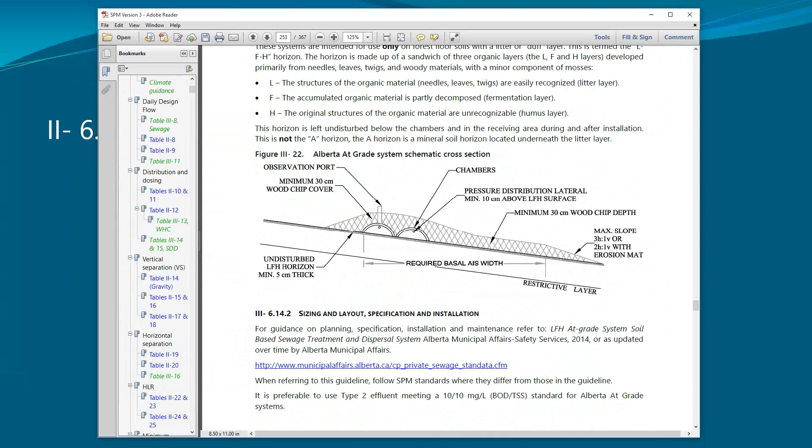An Alberta at-grade is brand new in this SPM, and it has to be placed on the LFH layer, the forest duff layer, and it's on a slope and so on. It's an entire whole set of standards we don't have time to get into today because I'm way over time. Okay, we're almost there, almost done. So the sizing of those things is different, configuration is different, they have their own standards. Alberta at-grade, different thing, has its own standards.

And sand mounds, just a few more slides. Sand mounds do have to have uniform distribution. You can't do a gravity system - you can't do a D-box to a sand mound.

The sand mounds include a check for the basal area. You have to size the area of the sand infiltrative surface based on mound sand loading rates, and then check that the base is big enough that the underlying soil can receive it. A good topic for another webinar is sand mound design. All the other stuff is the same as for previous standards, so if you're doing a sand mound, you look at that section, but also the previous sections dealing with dispersal systems general and pressure.

A few key points about sand mounds: they have to be level. Aggregate depth is different, only 4 inches if it's pea gravel, not 6, not 9. Sand media specs are completely different. We probably should have made sure we had enough time to go there, but we don't. You have to make sure you understand the sand media specs.

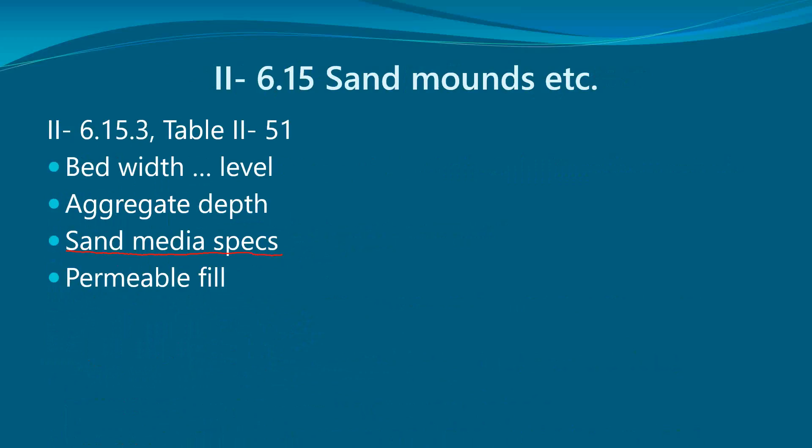Permeable fill for toes, two different types of observation ports, infiltrative surface and in the toes. It deals with cover depth, toe slope is 2 to 1. At least demand dosing is okay for a sand mound only if you're using type 1 loading rates, otherwise it has to be time dosing.

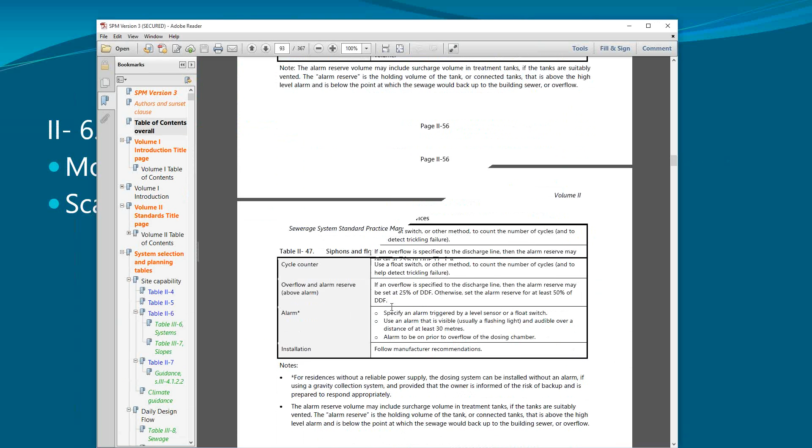Here's some more changes. Moisture content and soil damage it talks about. Let's have a quick look, because you guys got all night, right? Section 2.6.15, here's all our stuff on sand mounds.

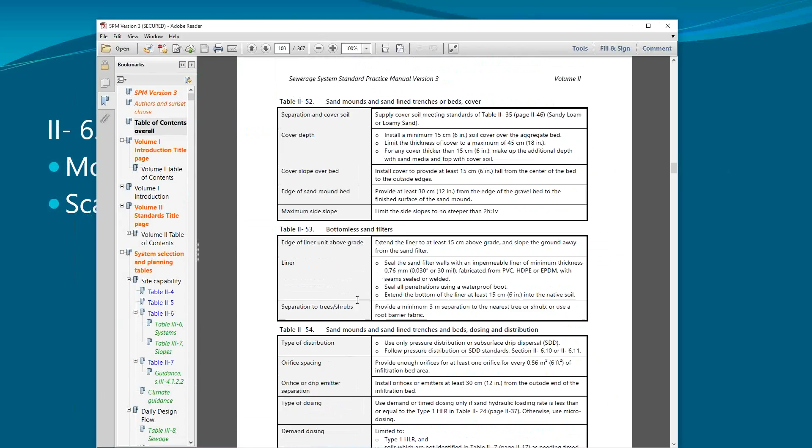I wanted to go to the installation stuff: dosing, distribution, installation. It talks about not using wheeled machinery on either the basal interface or the sand. You can't use skid steers and so on. It changes the gradation even of the sand. It has to be tracked machinery.

It talks about scarifying the soil, absolutely, minimum of 6 inches depth it says, which I think is a bit harsh if you only had 10 inches, but that's what it says. It says sand may be gently mixed into the native soil, and that's our basal interface sand remediation. We'll have a look at that.

The track machinery has to have sand under it. When you're placing the sand, you have to be super careful you're not making the basal interface less permeable. Hence all those standards, and hence you don't compact the sand. No vibrating compactors on the sand mound. You track pack it with an excavator, in other words, you settle the sand.

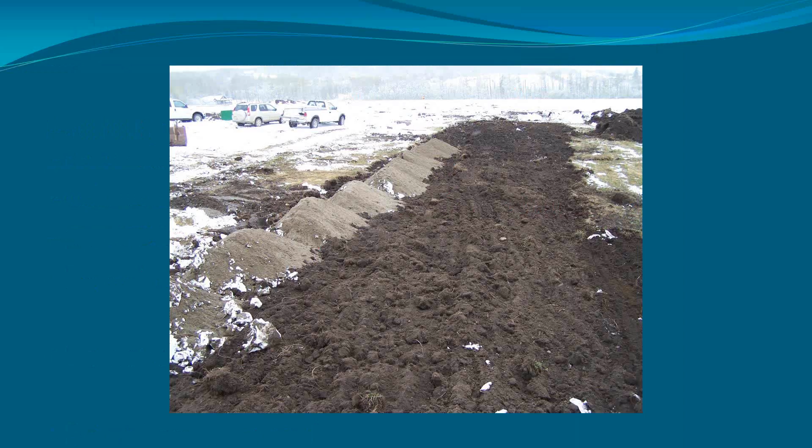And almost done. Did you believe me the first time I said that? Here is scarification and sand remediation. So we throw a little sand out there and scarify it again. We're blending sand into the surface layer to improve its vertical receiving ability, to improve its permeability, and make sure the sand mound doesn't break out at the toe.

There's sand remediation, then we place the sand with a tracked machine, track packing it, or in this case, because the machine was so big, I just squished it with the bucket, frankly. I didn't get the tracks up there, but with that big machine, that's enough, right? You can squish it. That infiltrative surface needs to be super level.

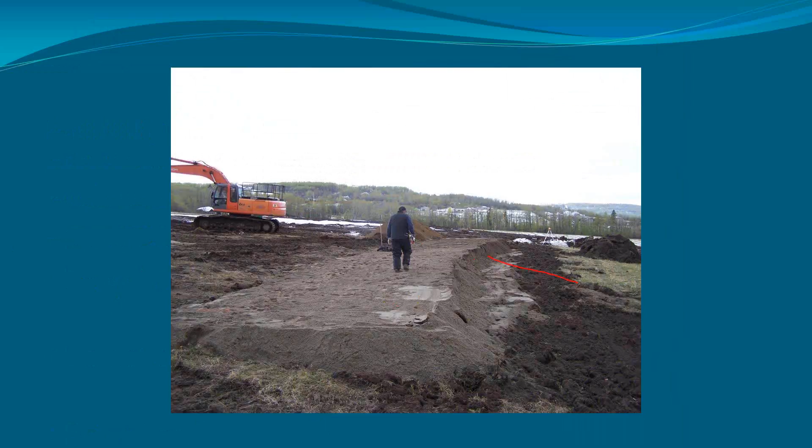All this stuff doesn't have to be mound sand, it can be pit run. Pit run over, pit run all the way down in here, all the toes. And in the end, it looks like that.

Sand mounds are huge, right? This is because the underlying soil is clay, fairly big house, but mostly because the underlying soil was so bad. So that was really just to achieve the basal loading check, to make sure the underlying soil is good enough. And of course, linear loading is awful when the underlying soil is so shallow. So this thing, I think, was 110 feet long with an extended toe blanket. And when it's all over, it looks like that, except it hasn't been raked yet.

And now we pretty much are done. There are other new standards for evapotranspiration absorption beds or something like that. Lagoons, mostly the lagoon stuff is about preventing backflow, and there's new standards for site drainage. And that, finally, is it.